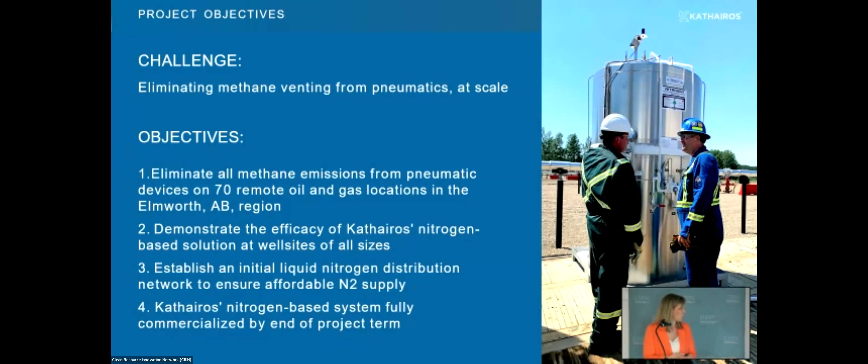So this project wasn't testing out the technology itself, it was testing out improving the commercial viability of the project. We actually started with 40 sites that we were going to put these tanks on, in partnership with Cenovus, and then Ovintiv wanted to join as well, and we increased the number of sites to 70. They're all operating in the Grand Prairie region. With this number of sites, we then have those economies of scale to provide economic nitrogen distribution around the region, around the province. So that's really kind of the gist of the project.

When we think about where we're at today, there's a bit of a typo here. So we have 42 tanks currently installed on 32 sites, and the remaining 38 sites are going to be installed in June. This has been happening since March, but really the bulk of these tanks were installed over the last couple months. These range from single well pads to large 22 well pads, which is our largest that we're currently servicing. Everything's worked flawlessly, no incidents.

And yeah, by having these initial 32 and growing to 70 sites in the field, we have achieved our objective of being able to provide nitrogen economically to our customers. It was our initial hope when we started this project that by the end of the project in March 2024, we'd be fully commercial, but we're fully commercial now and have customers across the region joining on that are now able to benefit from these lower nitrogen prices, as well as the technology in general.

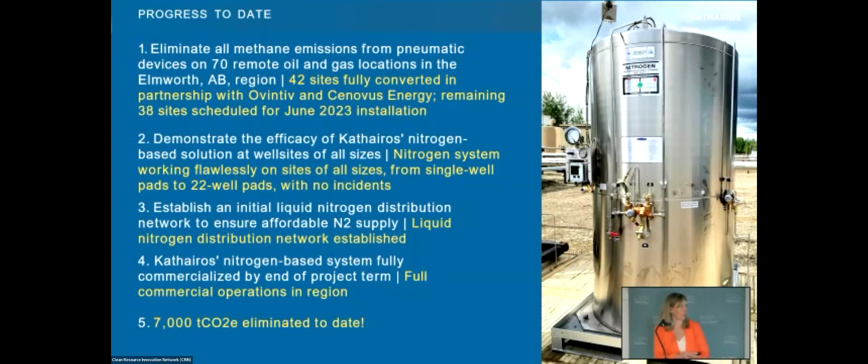And so to date, even though most of these tanks only came online the last few months, we can already say that we've eliminated 7,000 tons of CO2 equivalent directly associated to this project. And of course, that will triple, if not quadruple, by the end of the project, but is really just setting the stage for significant emissions reductions moving forward across the industry.

So we were asked to speak to the good and the bad experiences we've had through this project, the various struggles. Lots of good experiences, things pretty much went as we hoped they would. We've also had really great support from CRIN, of course, as well as our partners at Ovintiv and Cenovus. It's just been really great to see them get behind it and really buy into the technology. The bad, not really too much to say. I think there were some administrative hiccups as we started getting going back last year, but that's all been ironed out. Everything's working great now in terms of navigating these relationships with other organizations.

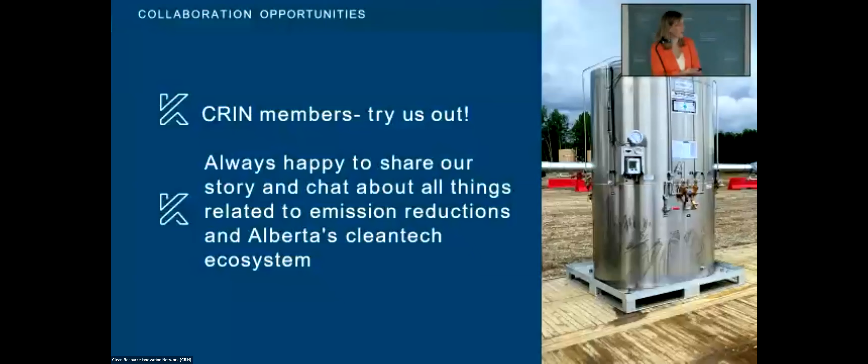The ugly, this is really not even related to this project at all. It's just kind of an ongoing frustration I have, which is the lack of regulatory certainty we have right now in Canada regarding pneumatics. This is compared to the US, where there are very strong regulations, very specific, very detailed, and we're really seeing our sales skyrocket in the US. And while things are growing here, I think that is the one really major difference.

Collaboration opportunities. We're always happy to trial our systems for anyone. If you don't like it, we'll just take one of our tanks off, and it's a pretty easy, simple process. I'm also always loving to chat, not just about our technology, but about Alberta and Canada's clean tech ecosystem, which I think is just a really exciting place to be right now.

And then finally, next steps. So 38 more sites still to do, scheduled for June. And then obviously we're going to keep an eye on them, make sure that everything continues to work as they have been, and see if there's any ways to optimize the performance or the operations. We provide emissions reporting every month to our customers. We're also serializing our first round of offsets, which have been independently verified for 2022, and continuing to build our outreach and growth in Canada.

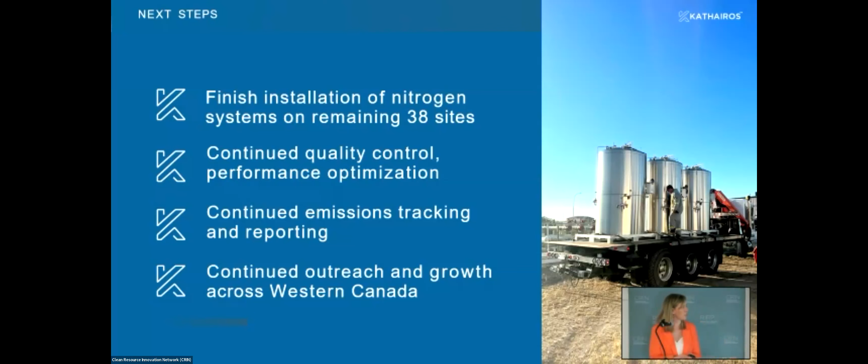Thank you, Jacqueline. I remember we hosted a webinar during the pandemic for Kathairos, and it's wonderful to see the growth, and thank you to CRIN for enabling that growth. At the time, you were just looking for the first site, right? So now it's great to see you moving on to double-digit numbers.

The next presentation is a cost-effective and accurate end-to-end multi-sensor digital platform for methane detection, quantification, monitoring, reporting, and prediction. And it will be presented by Steve Liang of SensorUp. Dr. Steve Liang completed a Bachelor of Science in Surveying Engineering at National Cheng Kung University in Taiwan in 1999, and earned his doctorate in Earth Space Science at York University in Toronto in 2007.

He is currently an associate professor at the University of Calgary and the director of the Geosensor Web Laboratory. In 2013, he was chosen as one of Calgary's top 40 under 40 by Avenue magazine. Dr. Liang has been an invited speaker at universities and industries in 11 countries and held the AITF Microsoft Industry Research Chair on the Open Sensor Web from 2011 to 2014. I'm pleased to welcome Steve Liang to the podium.

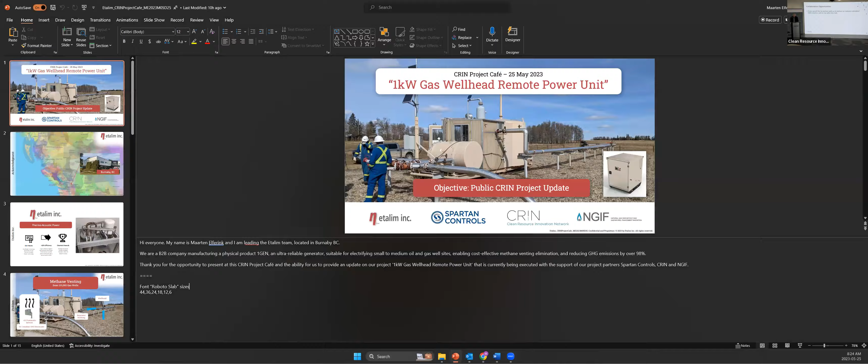Our next presentation is titled 1 Kilowatt Electric Gas Wellhead Remote Power Unit, and it will be presented by Maarten Elfrink of Etalim. Martin has experience bringing ideas from concept sketch to mid-volume manufacturing in both small and large organizations. He has over 12 years of experience as mechanical design engineer, system architect, project, product, and program manager, and team lead of up to 15 people in the clean tech and printing industries.

And Martin is not with us in person, but he'll join us through the wires behind this screen. I'm assuming you're online, so go ahead, Martin. All right. I hope everyone can hear me. It's super weird to join this online because I have no clue who I'm speaking to. Can somebody let me know what kind of audience we have and how many people? It gives me a bit of an image. About 20, 30 people in person here, and an equivalent number online. The numbers fluctuate, but you have a great audience of knowledgeable people with a lot of experience in the methane space. Excellent, very good. Thank you. It gives me an image of who I'm presenting to.

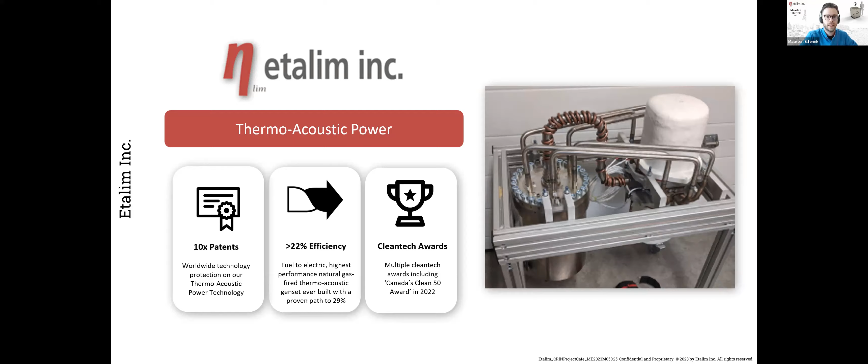We are excited to use the methane venting reduction efforts in the oil and gas industry as our beachhead market. As most of you already know, there are 130,000 gas wells in Western Canada that, through venting of methane from pneumatic processing devices, are responsible for 1% of all of Canada's greenhouse gas emissions. This is not only the oil and gas sector. This is all the emissions that Canada is putting out there on an annual basis.

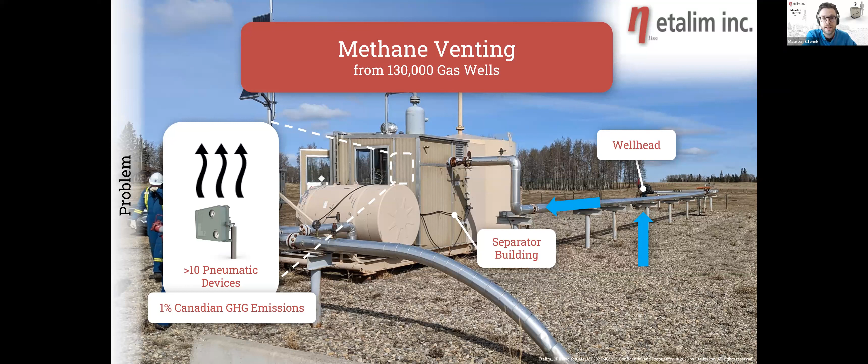This impact is recognized by the government, and regulations are being put in place to eliminate this, which means many well sites need to be converted to energize the processing devices differently. Many of these sites are located remotely, meaning that no grid power is available and/or accessibility is challenging as well. So different solutions exist, as Jacqueline from Kathairos was already mentioning, using the regular bleed pneumatic instrumentation as the baseline, because there are still instruments like this out in the field that are venting traditionally.

Improvements can be made by switching to low bleed pneumatic controls, but this is only a partial solution. Capture and burn is also possible, but technically challenging and a waste of energy. Using nitrogen can eliminate emissions during the use phase, but it would still require cost and emissions of the supply chain. So that's something to keep in mind.

The main solution being implemented at the moment, based on our understanding, is electrification, with the big advantage of reducing site visits by being able to remotely tune your asset. On-site electrical power allows existing pneumatic instrumentation to be powered with compressed air or directly actuate electrical instrumentation. So there are different variations available there. Just to give an overview of our current understanding of what is happening in the industry.

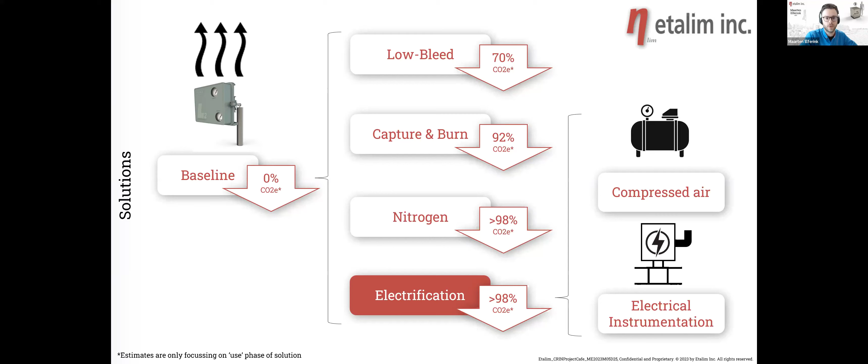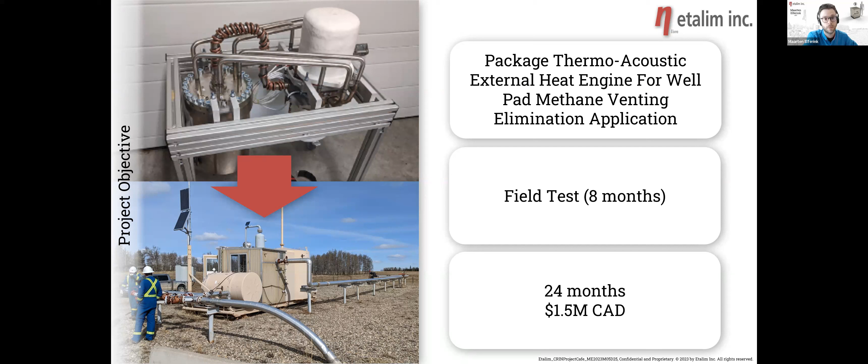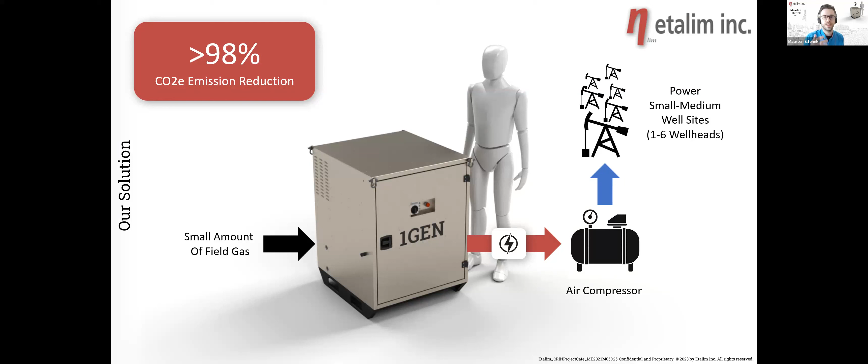Let me continue. Okay, so at Etalim, we developed a unique electrical generator, which you can see on the screen, which we call 1Gen. A small amount of field gas that otherwise would have been vented is used to generate power and drive a compressor that energizes the existing devices with compressed air, reducing greenhouse gas emissions by over 98%. 1Gen can power up to 6 wellheads per unit, making it ideal for mid to small size well sites.

So 1Gen will be able to deliver a peak power of approximately 2.4 kilowatts, while at continuous running it consumes a field gas equivalent of about 2 low bleed instruments. We're designing for a 2-year maintenance interval, even though the core engine is expected to last well over 10 years without any maintenance. The complete unit is developed for -40 to 50 C or 55 C without the need for additional cold start packages. So that's part of the core of our design directly.

We are certifying under UL 2200, making 1Gen suitable for general purpose areas. And we expect that 1Gen will be able to deliver a very attractive and cost-effective electrification solution for small to medium well sites. And that's what this project is about. We're going to prove that.

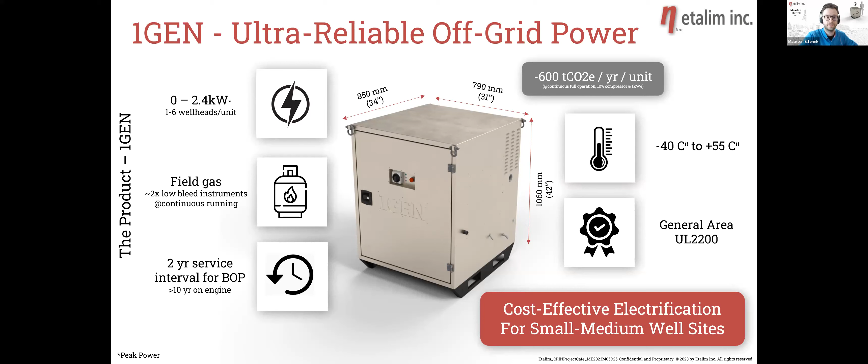Our thermoacoustic technology is what is behind all of this and allows 1Gen to be an ultra low maintenance system, since it does not contain any sliding or rotating parts. The engine consists of simple parts that have been inspired by automotive manufacturing techniques and that have been developed over the last couple of years. 1Gen is ultra reliable and the core engine is expected to last well over 10 years without any maintenance.

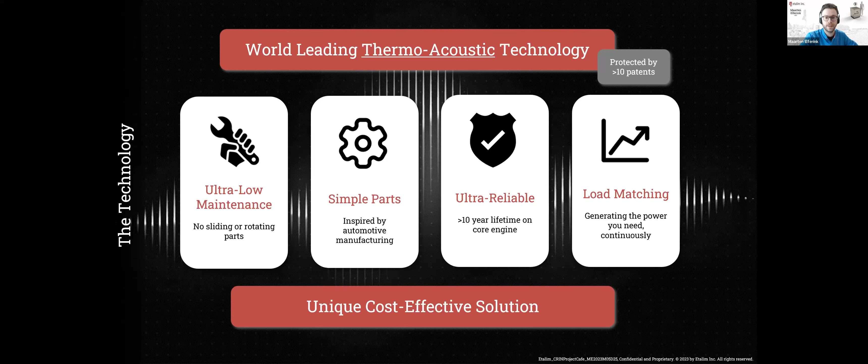Thermoacoustic technology allows for true load matching between 0 and 100%, meaning you never have to actually turn off our engine. We believe we can provide a unique cost-effective solution for this application based on our thermoacoustic knowledge and the physics that is behind this.

Even though not part of this project we discussed today, I would like to mention a couple of 1Gen features that came out of customer interviews and are built into the 1Gen architecture from the get-go. Besides field gas, we will also be able to combust natural gas or propane. Configuring 1Gen in an array is also important because it will enable customers to easily follow changing power demands over the lifetime of an asset.

1Gen can easily be redeployed at a different site and allows for modularization and unification of power generation equipment among assets. 1Gen has been prepared to use its waste heat to be utilized for external glycol heat tracing as well. 1Gen is also expected to be a great fit for solar hybrid systems. We expect that due to the true load matching capability, solar hybrid systems can be made more cost effective due to reduction of solar array and battery bank sizing, often designed for corner case situations. We believe that these features make 1Gen future-proof.

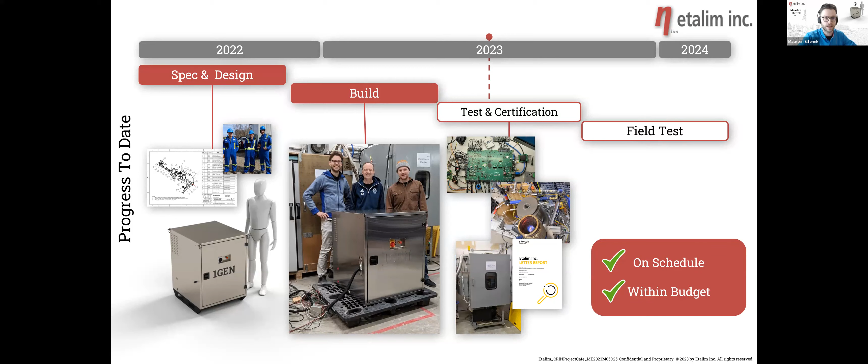Nevertheless, let's get further to the actual project we're going to talk about instead of just a sales pitch. The current project contains 4 stages. So there's design, build, certification, and the field test. We have successfully completed the specification, design, and build stages and are currently making good progress in the test and certification stage. So regarding challenges and lessons learned, I gathered a couple key items from our project so far.

So first, a challenge at the start of this project is that at Etalim, we did not have detailed application knowledge. So we're learning as we're going. I was also at the PTAC conference, learned a lot, and we're trying to keep this communication open to keep learning all the way. So by going out in the field at the beginning of this project with our partner, Spartan Controls, we learned a lot, just going to the field, understanding what this application looks like and where this device actually ends up. So that's a picture which you can see on the right hand side of your screen. And that was very helpful.

Regarding supply chain challenges, at the start, we encountered challenges due to COVID-19 and currently are also experiencing the effects of inflation, right? Which is not necessarily adjusted in our project budget. So that's where we have to be creative. And we are using, for example, some legacy parts from previous projects in order to be able to push this project further ahead. We also did early ordering of parts in order to have them available in time because the lead times have been really long on a lot of parts.

Verification of specifications is also something which is still work in progress. However, we started very early with sub-assembly testing to get good indications if we're going in the right direction. And a good example is our burner test bench, where we were fine-tuning the burner and the fuel train. The project timeline allows for a very limited number of design iterations. So we try to keep our design as simple as possible and design it modular, so it's possible to upgrade sub-assemblies as we go without holding up the project.

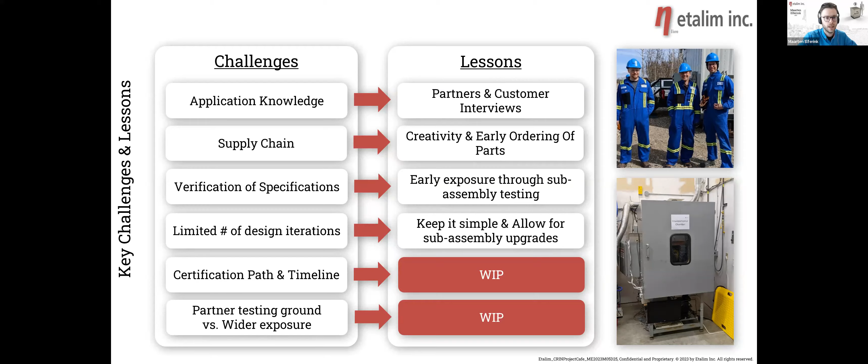Nevertheless, regarding collaboration opportunities, we thought about this a little bit and put a couple items together. We strive to be in close communication with potential customers to help us with product tuning, as I already mentioned, and make sure that we're actually solving a problem of theirs. Even though we're expecting to use the NGIF Emissions Testing Centre for future testing, as a company, we want to solve a real-life problem in the field as soon as possible, because this is creating credibility for us as well. So we're trying to mix and match that as well.

Another opportunity to work together. While we still learn every day about this application, we notice that well site power requirements is a complex matter and something that is not always that well understood in order to get a cost-effective methane elimination of the industry as soon as possible.

I think there's a great opportunity to share applied knowledge on optimized well site electrification among producers and equipment suppliers. And I think that is something that everybody could benefit from, and all the speakers here even could benefit from. So I don't have a solution for that, but maybe CRIN can help with that as well, to think about how we can improve on that.

Another item which I would like to highlight is that life cycle analysis is a great tool to stay ahead of regulations. It helps to get an overview of emissions during the manufacturing, use, and end of life phases, so all phases of a product, right? And properly compare how future-proof solutions really are. So let's not only focus on the use phase or only on the manufacturing phase, but look at the complete picture in order to see what's the best solution on the long term for your company.

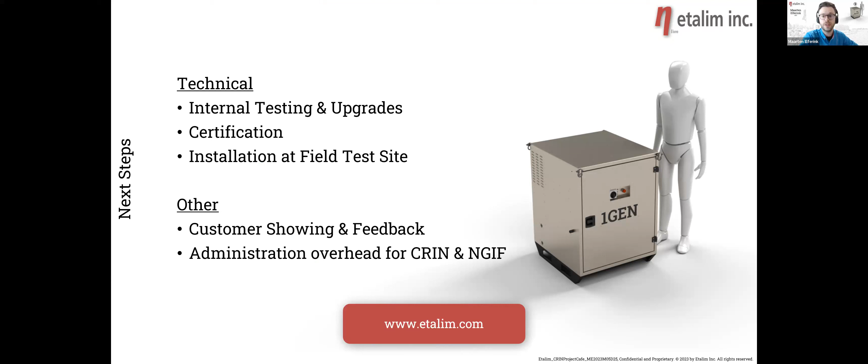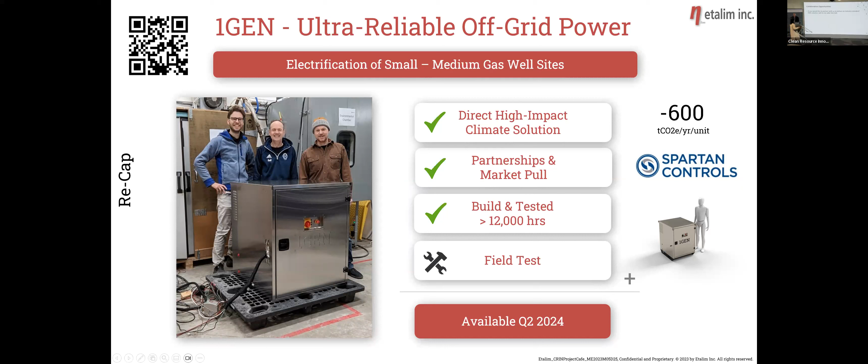Thank you, Martin. I'd like to move to the question and answer part of this event. We'll put a couple chairs here for Steve and Jacqueline, and Martin will be online also. So we'll have 3 panelists. I hope that people in the audience here and online have been thinking furiously about insightful questions. What would you like to know more? What do you think about the future for our panelists? We're looking also for the folks online to ask questions. So I'll start with the audience here. I see one in the back, and maybe we'll bring a microphone to you. Go for it.

Third-party nitrogen, or are you putting a membrane system in place in the area that you're supplying the nitrogen? Yeah, great question. So when we very first, shout out to Mark here in PTAC, because it was through PTAC funding that we did our initial field test, like one site, and we did get third-party nitrogen. But really the purpose of this project was to make sure that we could have our own fleet of trucks that are able to service this. And this is actually our founders. They have a long experience in cryogenic oil and gas services, and only recently have come to recognize this environmental application of it.